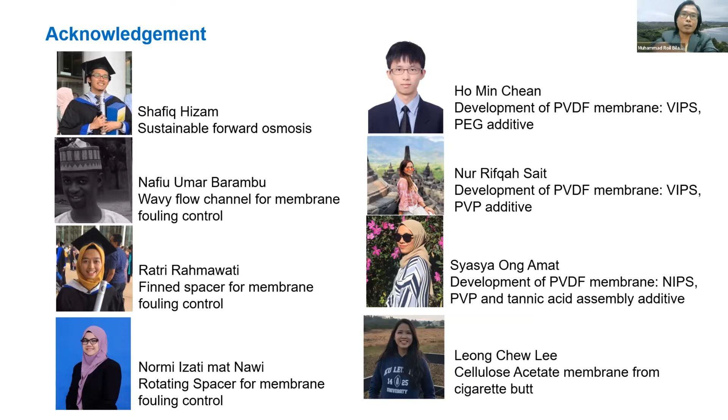Briefly, before I start, actually when you start with membrane, you will be dragged to work on many things. My background and training was on membrane bioreactor actually, but then it spun off to membrane fabrication. Most of my work is on membrane fouling, especially on optimization of aeration for fouling control and hydrodynamics. These 2 topics I will present as well during my talk.

Then there are other things that I have been working on: process intensification involving membrane. I also work on new applications of membranes, like for heat recovery, membrane oxygenator as I call it here, membrane as mixer, membrane adsorption, and many other things.

So my work on membrane and my love on membrane is beyond membrane for produced water, and the application is for many, as you can see from here. But the topic of my talk will touch on membrane fabrication and membrane fouling control for produced water treatment.

This is the outline of my talk. First of all, I will talk very generally on the context of produced water treatment and how membrane processes fit into the big picture, the big process.

Sorry, I have a battery issue. Did we lose him? Yeah, I think I lost him, but maybe he will join soon. I thought this was my computer. Maybe we will take a break for 5 minutes, until we fix the issue with him. He's coming back. Okay, all right, sorry, some technical issue, that's okay.

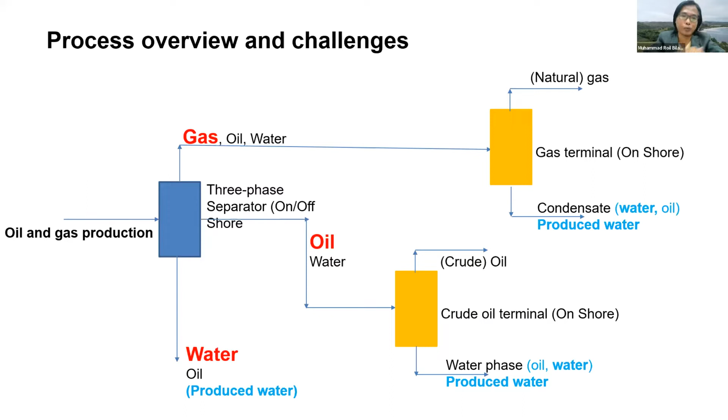Okay, so I continue. This is an overview of how produced water is generated. We initially have the water phase during the three-phase separation, so that's produced water, normally on the oil platform. Then the oil fraction will be piped to the terminal somewhere onshore.

From this stream as well, it contains a minor component of water. And then in the crude oil terminal, we also have produced water over there, so we have to deal with this too. In the gas terminal as well, through the pipeline, some of the water contained in the stream will condense, and it also generates a fraction of produced water. So there are three types of produced water I specify here, all termed produced water.

If you look into how the industry deals with produced water, first of all we have to look into what is inside. It contains suspended oil - you can see the black color of the water in the feed. We have emulsified oil in the form of a stable emulsion, where surfactant helps to stabilize the oil-water emulsion. This really depends on a case by case basis. It can have very high salinity, and it can contain metals, even toxic ones like boron, cyanide, organics including phenols, suspended solids, and sand particles.

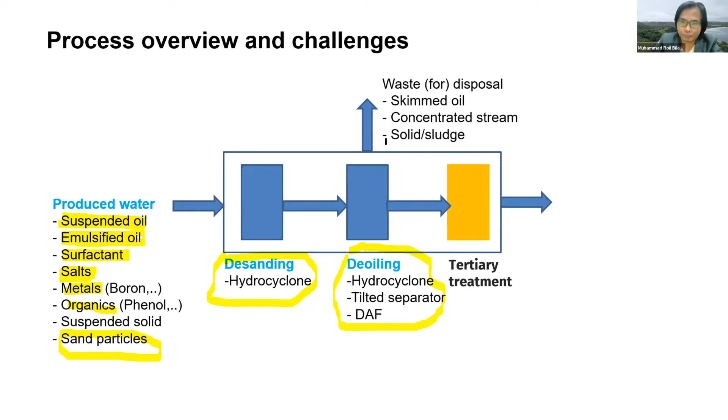Up to this point, then if needed, we add another process - this is the tertiary treatment. The need for tertiary treatment is affected by what we plan for the treated water: will it be for reuse, for example hydrofracturing, for irrigation, or for discharge? We need to develop processes to meet the criteria for these purposes. The tertiary treatments depend on the use of the treated water and the regulations for such purposes. Membrane processes normally fall into part of the tertiary treatment - this is how to see the context.

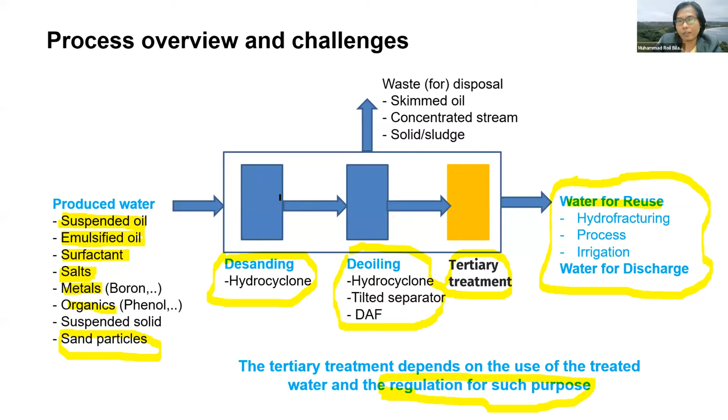As I said in this slide, what membrane process we need will really depend on the feed that we have, the performance of the de-oiling here, as well as what we want to achieve in the end. How are we going to deal with the treated water? For example, in Malaysia, if we want to discharge offshore, we need to have treated water that contains less than 30 ppm of oil.

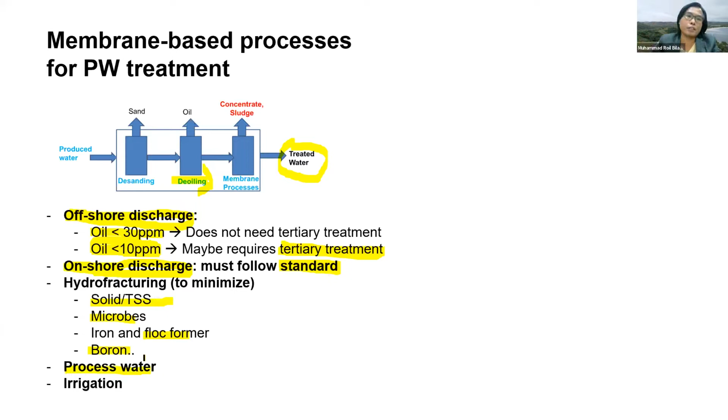If you want to discharge onshore, like in the gas terminal or oil terminal, it has to follow the standard regulation of wastewater discharge. From that, we can imagine what processes are required in the tertiary treatment. For example, if we want to reuse the treated water for hydrofracturing, then we need to minimize the solid, the microbe, iron, and anything that can form floc, boron. If we want to use it for process water, then we have to think about what tertiary treatment is required.

I made a summary of membrane processes that have been reported for produced water treatment. First of all, I think the one that will be mostly used is microfiltration and ultrafiltration. The main function of this process is that they are very effective in removing the oil-water emulsion.

They will definitely be required if in the end we want to apply nanofiltration or reverse osmosis. I think in the future, ultrafiltration and microfiltration will be largely used for offshore discharge, specifically to lower the oil concentration below 10 ppm. But the main issue for this process is membrane fouling, and after a few slides, I will talk in detail about how we can manage membrane fouling for treating oil and water emulsion.

The other process that can be used is nanofiltration and reverse osmosis. Basically, they are highly selective to water, so almost everything will be rejected if we apply this process. It will be placed somewhere at the end of the process to remove the salt, minor organics, maybe if organics removal is required. So we will need nanofiltration or reverse osmosis if we want to reuse our treated water for process.

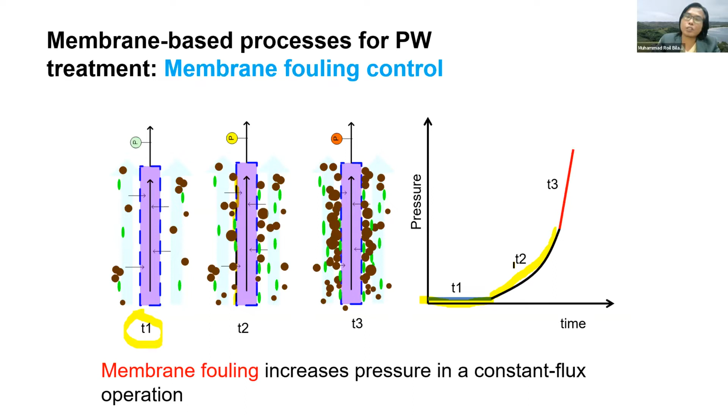So the main consequence of membrane fouling is that we need to operate the membrane in a complex way. It consists of operation cycles. Here I give, I don't know, 1, 2, 3 cycles involved in it. The filtration, for example, we cannot do continuously to accommodate fouling control, but instead we apply backwash and relaxation at certain intervals, normally around 10 to 30 minutes. It can be slightly beyond this, depending on the guideline of the membrane supplier. So we have a filtration cycle.

Then above that, we also have a maintenance cleaning cycle, where a low dose of cleaning chemicals is introduced to achieve a better cleaning. The interval of this cleaning can be from 1 to 2 weeks. It really depends on the operation and the criteria of the cleaning. And then once or twice a year, we'll need to do intensive chemical cleanings to restore the membrane performance that was lost due to membrane fouling.

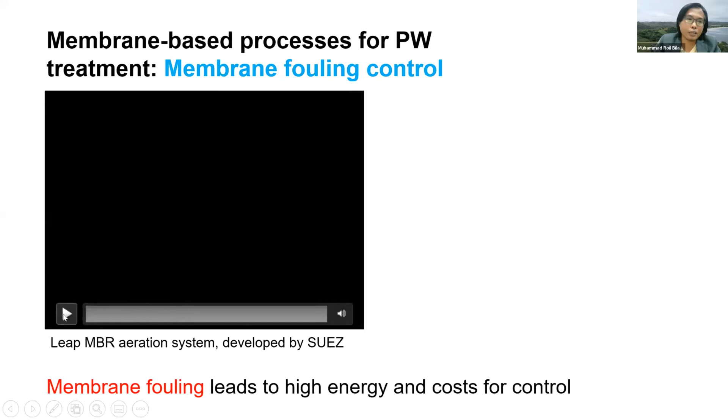I think the current effective way to do this is by implementing aeration. This is probably not necessarily applicable to produced water, but it is an example of a Leap MBR aeration system technology patented by SUEZ. You can see that they use fast flow of air to vibrate the hollow fiber and clean everything, every foulant that sticks on.

Okay, but the general approach for dealing with membrane fouling - there are so many, and I'll try to make a simplification here by classifying them into three.

We can play with the feed. We can do some pre-treatment so we'll have a feed that has low fouling propensity. Some flocculants can be dosed here, but probably not really relevant to produced water here.

We can also develop membranes that are resistant to fouling, improve the structure of the membrane, and fine-tune the surface chemistry of the membrane so that it is more resistant to fouling.

The last approach, more operational, is to deal with hydrodynamics. We try to induce local mixing near the membrane surface by manipulating the cross-flow velocity or flow of fluid around the membrane surface, introducing air bubbles as you can see from the video here, and some with module development. These are the approaches that can be used, and the part I want to talk about later is more on the hydrodynamics - how we can manipulate the hydrodynamics near the membrane surface.

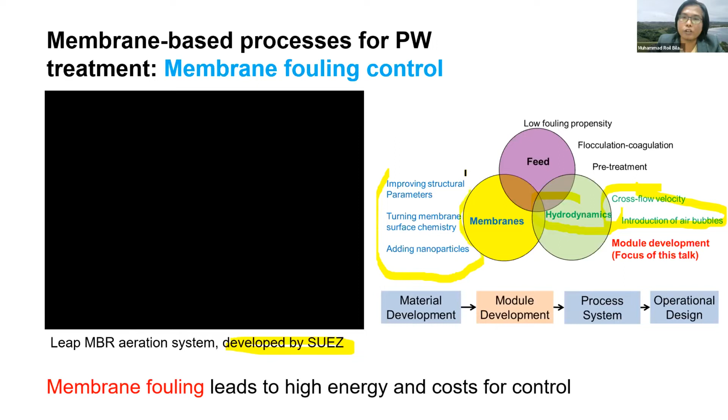Another thing is on membrane development. The first is that we develop new modules - we call it fin spacer. For the conventional membrane panel, we have a vertical plate and frame like this one.

If we go for air bubbles for membrane cleaning, the air bubbles will tend to move in the center. I have a short video here - I hope you can see it. If you have air bubbles, they tend to actually move away from the membrane surface.

So it's bubbling - the conventional bubbling has very poor efficiency. You generate a lot of bubbles, but actually the bubbles don't move near the membrane surface - they move as far as possible from it. And thus the aeration should be optimized.

So what we have developed in our group - you see here, this is a video of the system. We developed a spacer that looks like fins that help to direct the air bubbles to the membrane surface.

You see here that most of the bubbles go to the left side, so we can direct where we want the bubbles to move, and then they really move close to the membrane surface for cleaning. In this video, you can see if we switch to a different side, the system was equipped with a panel that can switch from left to right.

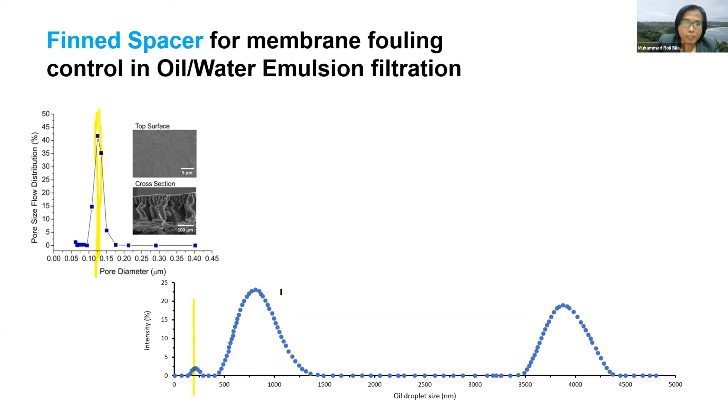In three of the studies I'll present later, we use a lab-made PVDF membrane with a pore size close to 0.1, some mean flow pore size here, and then the oil emulsion from the produced water has a size of about 200 nanometers. So there are three modes: around 200 nano, about 800, and about 4 micron.

In most cases, the oil rejection was very high, so I will not report it here. The use of ultrafiltration or microfiltration will provide very good rejection of oil in emulsion.

For this fin spacer, you see here that we managed to increase the steady state flux by almost double, by 86%. And as expected, the membrane side projected with aeration can offer up to 400 liters per square meter per hour per bar of permeability, and less so for the non-projected side.

Here we look into how many fins we can install. You can see that the more fins, the higher the flux, due to the shorter distance. We can see in the illustration here - if we have more fins, then we can keep the bubbles closer to the membrane surface compared to larger fin gaps.

We have a CFD simulation to try to visualize what's happening. You can see here the movement of the bubbles near the membrane surface on the left side. Actually, we can see there's a counterflow on the other side that assists the circulation of the liquid. So it's not only the contact of air bubbles to the membrane surface that plays a role, but also the secondary flow of liquid on the other side to ensure fluid circulation.

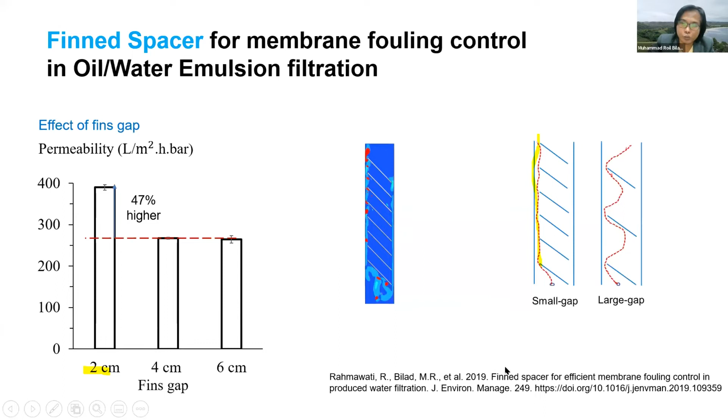Later on, I will share my slides. If you want to know more detail, then you can refer to the publication here.

Another approach we are working on: many people try to develop corrugated or patterned membranes, but when they do that, they have to compensate on other membrane properties. The aim of surface corrugation is basically to enhance local mixing and also increase the surface area of the membrane.

So we have a different idea. Why don't we just use the flat membrane that people normally use, which you can even buy, but instead of a flat arrangement, make a wavy flow channel like this one?

We try to simulate what happens through the flow, and you see here we induce a lot of swirling effect. Basically, we can bend the liquid inside here, and this bending will improve the contact of the liquid or flow on the membrane surface.

As we expect, the wavy channel can achieve about 220 in permeability, while the flat one, as the reference, only achieves about 180.

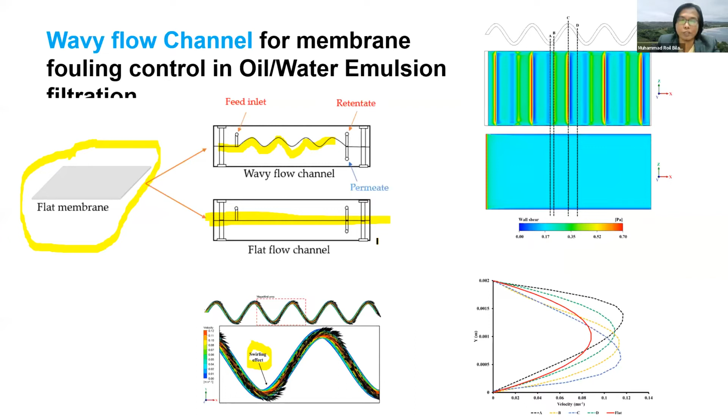We also try to estimate the energy consumption. With this type of membrane, you have a longer flow path, and the nature of the module will affect the pressure drop, which eventually increases energy use. But actually, there is not much energy increment in terms of pressure loss. So this is the second approach we use, improving the hydrodynamics near the membrane surface.

Lastly, this is a new result we have. You can find some commercial products that already have rotating membranes, but the implementation of a rotating system is not that easy, based on our experience.

So instead of rotating the membrane, why don't we develop a spacer that can rotate, so the membrane stays static? This kind of spacer can be placed in a currently established membrane setup. We have a plate and frame membrane, and we put a spacer in between, and this spacer rotates, consuming much less energy.

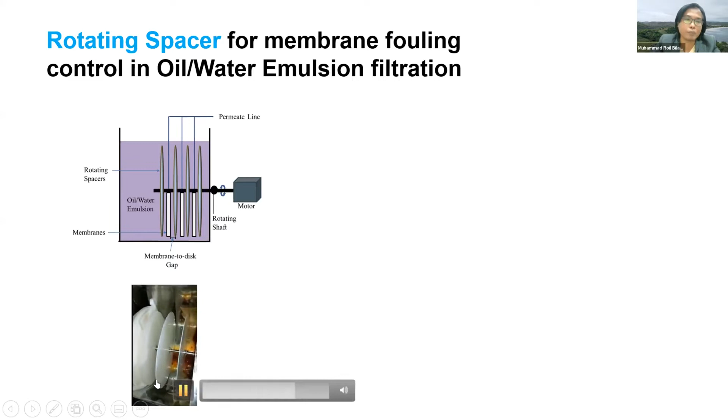This is an illustration of the system. We've developed a bench scale setup here. Maybe it's not very visible, but this static part is where we place our membrane surface, and the disc is the rotating disc that acts as a spacer in our lab scale setup.

We try to visualize this in our experiments. We just use half the diameter, purely from a practical point of view.

Then we look into what the shear rate and shear stress would be on the membrane surface, and here is the contour of the flow around the membrane surface using a CFD approach. The result was quite convincing.

We can increase permeability from about 120 for the static system up to 180 if we rotate it at a speed of 50 RPM.

By the way, this 50 RPM translates to a quite high RPM because of the small dimension of our setup. In a full scale setup with probably a 2 meter diameter disc, we would only require a few RPM to achieve the same linear velocity.

As might be expected, if we place the membrane closer to the disc, at 0.5 centimeter, we achieve higher permeability than if we put it a little farther away.

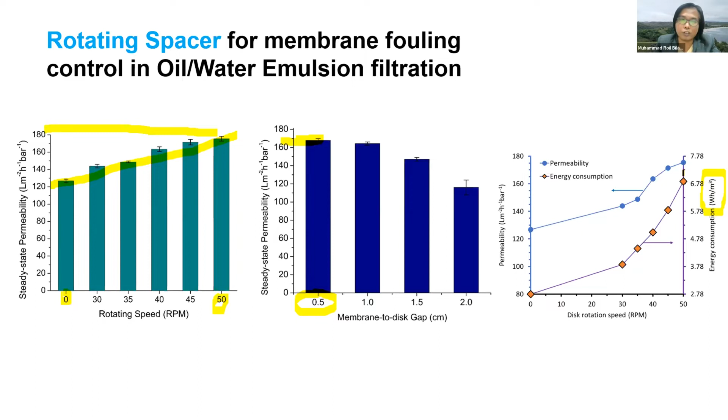The next approach we use is forward osmosis. Why do we go for this one? Because we are dealing with produced water at a gas terminal, which is normally located near the seashore, so we have abundant access to seawater. We found that the produced water has quite low salinity, so we thought of using seawater as the draw solution. Many of you may not be familiar with FO, so let me make an illustration here.

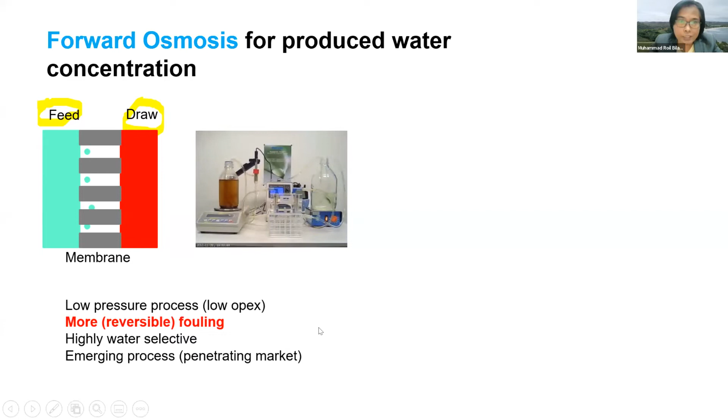The good thing is it's a low pressure process. When we set it this way, the FO will have very low energy consumption because we don't need to deal with draw solution recovery. The process is highly water selective, so basically it will retain almost everything but water. Also, I think it's penetrating the market currently, so it's good for the future. But I want to challenge the claim here about it being less fouling, because of what happened.

So this is the approach that we use, I'll talk a little bit later on. So what happened was this is a control feed, basically clean water, the demineralized water. And then we run demineralized water and produced water in this setup, basically for concentration. So we try to see how much we can concentrate.

And then you can see here that after some time, the flux becomes zero. At this point, we achieve basically equal osmotic pressure concentration, so we cannot achieve beyond this. But the most telling thing is that if you look into the initial flux, the initial flux of the control feed, which is demineralized water, is much higher than produced water. So this is a very strong indication of membrane fouling.

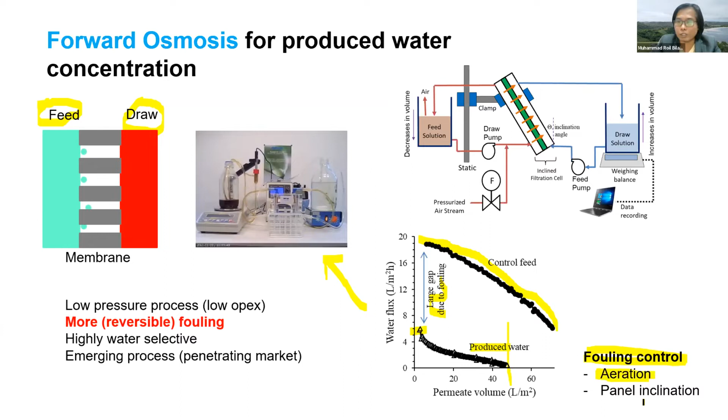So what we achieved, 2 minutes Doctor, okay, what we achieved was a clear improvement in the relative water flux. We can increase it by 60% here. And also we can further improve the performance by using panel inclination.

Okay, I thought I was given 45 minutes. Oh yeah, it's 45 minutes.

Sorry, so I will not go into detail on my point number 5, but the approach we are using here is to develop phase-inverted membranes by incorporating hydrophilic additives, using PEG, PVP, and this one with tannic acid.

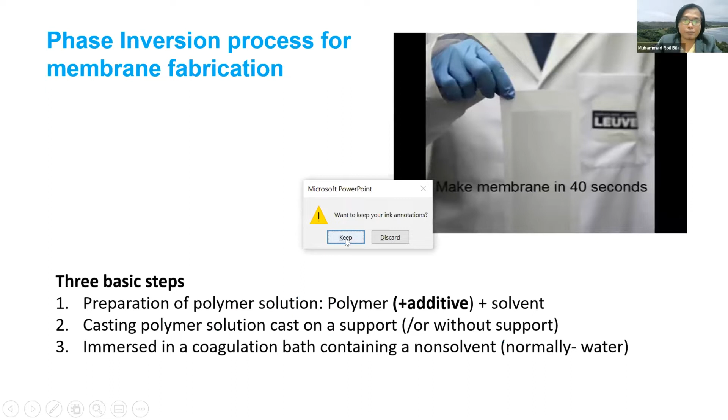The most challenging part of incorporating hydrophilic additives is that they try to leach out during fabrication, so we don't end up with a membrane with hydrophilic properties, because your additive leaches out. Our solution was to implement the VIPS process, vapor induced phase separation.

Actually, we introduced some time gaps between the casting and coagulation. Here we use PEG additive. We achieve quite good performance, as you can see from the flux here, but the issue was that PVDF is semi-crystalline. So as we apply a longer time, the structure becomes quite brittle and the mechanical strength was weaker.

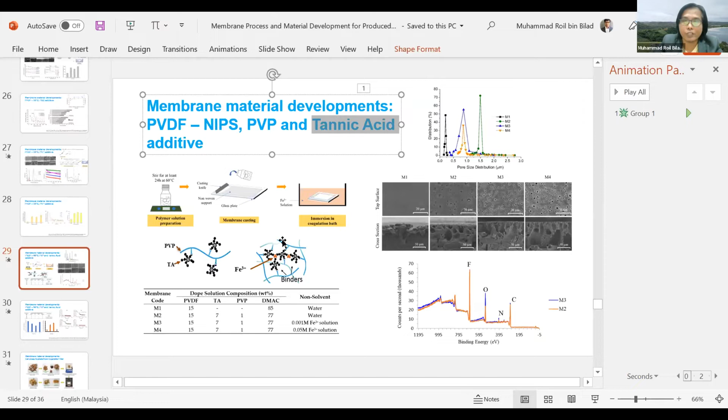We tried to apply a different additive, PVP, but the same issue was that the PVP was leached out. In the final approach, we incorporate another additive, tannic acid, and we form a complex of Fe, PVP, and tannic acid to bind the hydrophilic additive and achieve quite high membrane performance. I will not discuss the last things, so this is what we have achieved so far.

So through hydrodynamic enhancement, we can achieve permeability of around 400 here using finnel spacer. Okay, using finnel spacer here. I'm sorry.

Okay, rotary spacer, we can go only up to 150, wavy flow channel around 200. PVDF, PEG we can have only this amount, PVDF, PVP only this amount. But the last approach, when we combine PVP, tannic acid with complexation chemistry, assembly of tannic acid and PVP, we can achieve close to 350.

So I think the two approaches, to apply finnel spacer and develop membrane material in a smart way, hydrophilic membrane material, can offer good performance.

Okay, I move to the last slide. To deal with membrane fouling in produced water, we probably need to go with multi-prong approaches, not only hydrodynamics or only materials, but a combination of multiple approaches at the same time. I think that's the best approach.

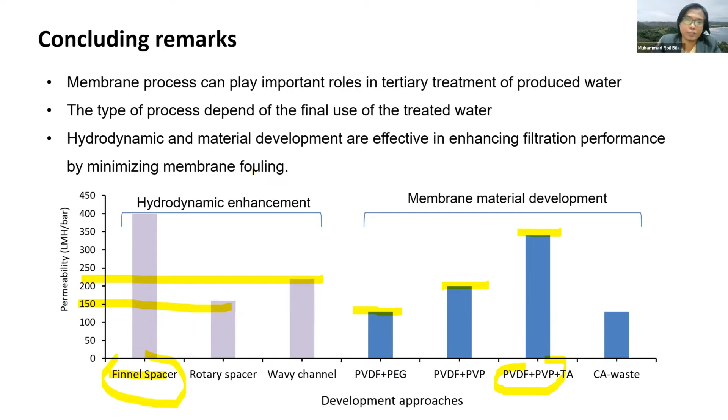Another thing is probably what's next with the concentrate. So whenever we have a membrane, for example RO, we have brine. If we are now treating produced water with high oil-water emulsion, oil concentration, then what happens to that? That is one of the untapped research areas, I think.

Another thing is it's about time to go more holistic, or take a more engineering approach in implementation of membrane processes for produced water. I think that's all from me.

The last few slides I skipped quite fast. I didn't realize I already spent 45 minutes. I think that's all from me. I will welcome questions.

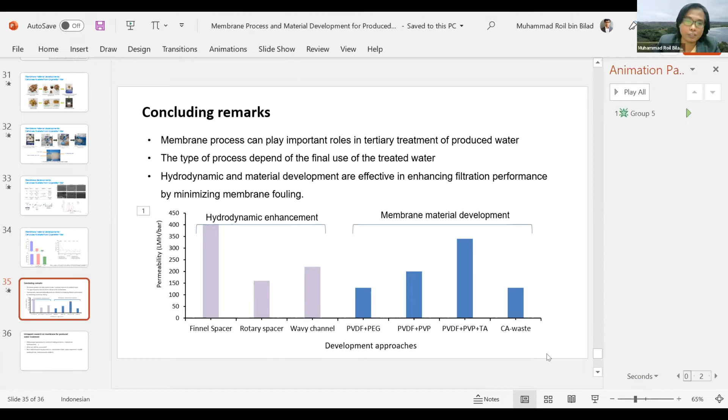Yeah, I was thinking about this the other day. Why not use sponge balls, like those used to clean heat exchangers from the inside? Is it a possibility to use those sponge balls, squeeze them, and then clean the surface?

Is that a possibility? Well, all of you are very smart already, so you get what we are doing now. Actually what we do now is very simple. We add some sponge on the surface, and it's like a wiper in a car that cleans it all the time. It works really well, and we can achieve like double what we achieve now. Yes, that's very true, we are working on that one. We're producing some results already.

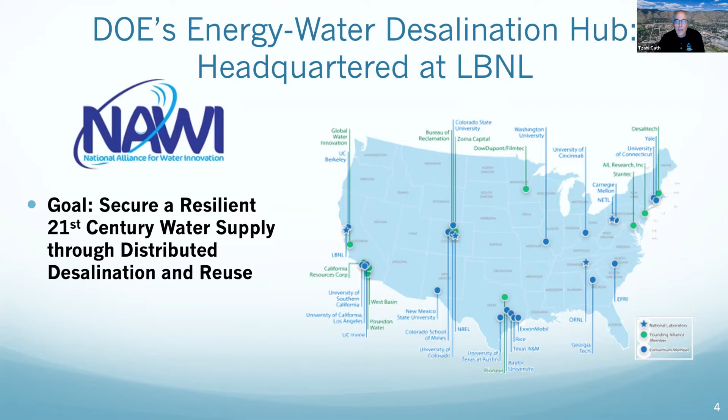So NAWI is a new center funded by DOE, led by 4 national labs and many universities and other partners, with a focus to reduce the cost of desalination of unconventional sources of water, including industrial wastewater like produced water. It's $100 million over 5 years with a focus of TRL 2 to 5. Again, TRL is technology readiness level, so we are stopping before piloting.

This is early stage applied research with 4 topic areas, specifically material research and development, process innovation, modeling and simulation, and integrated data and analysis. We just finished the first year, with the main role of the first year to do road mapping, to look at what are the research gaps in the different areas of reducing water cost. In years 2 to 5, we will have applied research in universities and a lot of collaboration between university and national labs.

So I introduced the different topic areas, but there are also challenge areas. We identify 6 challenge areas with the acronym A-PRIME: autonomous systems, how do we operate systems remotely; precision separation, with the eye to recover valuable material.

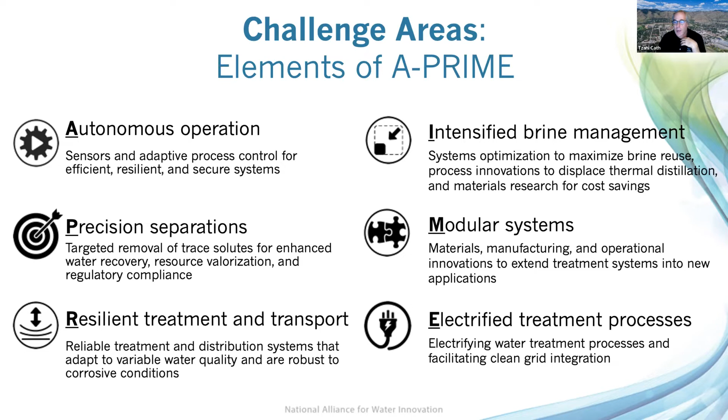Resilient treatment and transport through membranes and through other processes; integrated, intensified brine management - again, as was mentioned today, when we start desalinating water, we are generating very concentrated brine, what can we do with them; modular systems, we are very familiar with it in oil and gas, we want things to be modular, move from one wellhead to another; and electrified treatment process, which I'm still trying to understand exactly what it means, but it has different heads. It's about how to make processes more electrified, like electrocoagulation, and how to combine renewable energy into operations in the field in remote locations. So this is how the world of NAWI looks like.

Here are the challenge areas, the 6 challenge areas and the 4 topic areas, and all the research will go towards the goal of 90% of non-traditional water sources achieving pipe parity. What is pipe parity? Pipe parity is how to bring the cost of the next gallon of water, which is usually more expensive, to the current cost of water.

And when you look at the pipe parity metrics, you can measure pipe parity under different units, like dollar per meter cubed, or how many kilowatts per meter cubed, or what's the water intensity. You have different measures, and we still collect different metrics for pipe parity, but the main topic is looking at the energy cost and the levelized cost of water.

And under all these confusing things, we are focusing on several industries: the power industry, resource extraction where oil and gas is sitting together with mining, other industries, municipal water to include seawater desalination and brackish water desalination, and agricultural. Again, all of you know that these are really energy and water intensive industries.

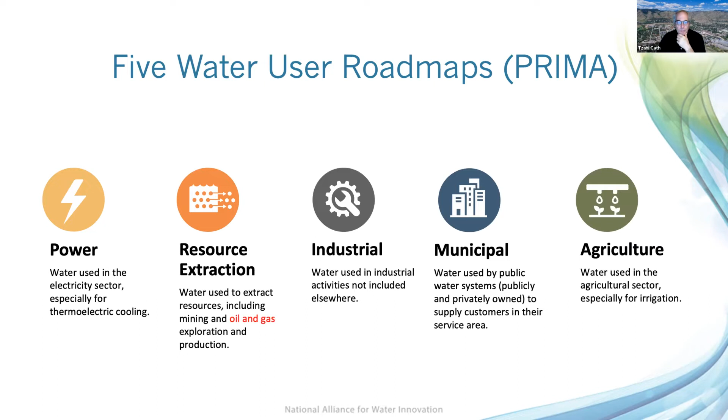So now we just finished and published the roadmap, the master roadmap for NAWI. You can go to the web and download it. I was in charge, with a colleague from UT Austin, Professor Lynn Katz, of the roadmap for the oil and gas sector, and that's published under the same web page. You can also download and see it.

And we recently published a paper on a technology baseline. So what's now existing? What's the cost? We gave a few case studies on specific applications of technologies for water reuse. And I think one of the things we focus on towards the end of the paper is the chemical characterization and toxicity challenges of produced water, looking at future toxicity as a measure of how well we are treating water.

Because, as you know, produced water has a lot of contaminants, and especially when it comes to organic contaminants, it's almost impossible to characterize exactly what's there and how well it's been removed. It's also very expensive to do this analysis. So toxicity can be one measure, and we propose methods for incorporating adverse outcome pathways and toxicity analysis of produced water for reuse. I will not read the paper here. You are more than welcome to go download it and look at what we have proposed.

So, treatment challenges. Again, I will go quickly because Dr. Bilad already mentioned many of these things. Water is a major component in the oil and gas industry, and the major challenges are the high variability of both quantity and quality of the water, and the high salinity.

And when we have high salinity, sometimes some processes are just irrelevant, because of high osmotic pressure, as Dr. Bilad mentioned. You cannot use reverse osmosis, and I will talk a little bit about forward osmosis too.

The other challenge is that it's all about the market. Should we reuse the water or just get rid of it? What's more expensive, to treat the water or to secure new water? Different places in the world have different challenges. Some places you want to get rid of the water; sometimes you really want to reuse it because you don't have other options.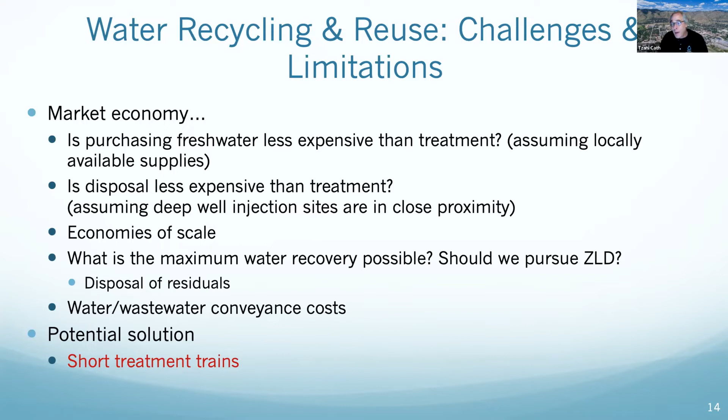So the potential solution we think about is how to make shorter treatment processes, because every process you add—pre-treatment, desalination, post-treatment—just becomes more expensive. So if you have a short treatment train with a few processes that can do most of the treatment, you save money. Okay, so a few thoughts about the cost of desalination.

Seawater reverse osmosis, we all know, is the workhorse. Thermodynamically, we're there—we cannot improve it much more. And when we do seawater desalination, we cannot do much more than 60% recovery, again because of osmotic pressure. We're starting with around 3.5%, which some produced waters are at this level; some are much more concentrated than this.

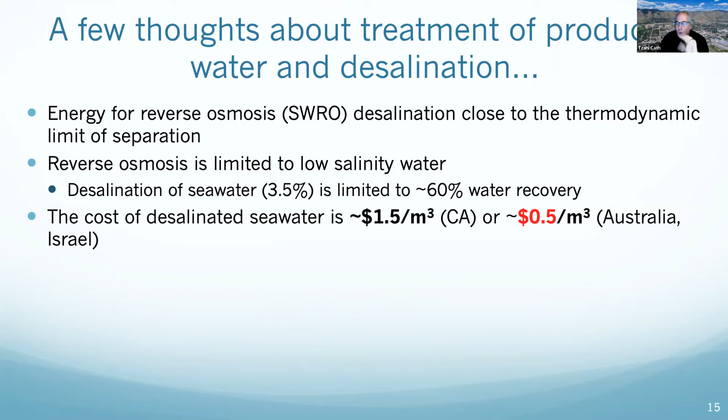Now, if you look at the cost of seawater desalination today with reverse osmosis, in the US it's still a little bit expensive. Places like Australia and Israel have other ways to do it, and it's much cheaper. In the US, in a good day, in a good place, it costs $0.5 per barrel for deep well injection disposal of produced water. When you do the conversion, there are 6.3 barrels in 1 cubic meter.

It tells you that you need to be much less than $3.5 per cubic meter in order for your process to be better than disposal. So it is a challenge, and it's difficult to figure out how to treat it so that the industry will adopt new technologies.

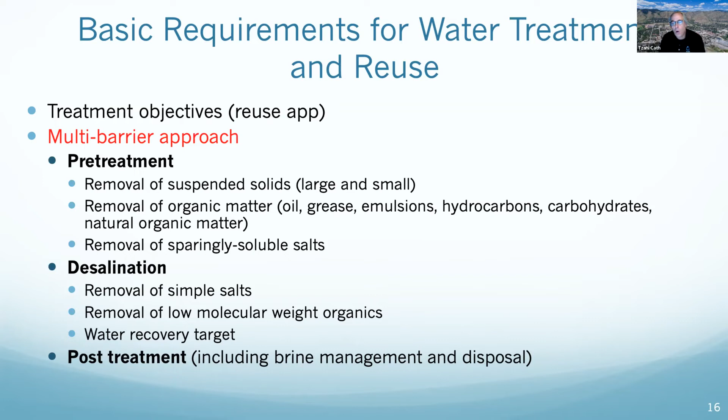So the basic requirement for treatment is a multi-barrier approach: pre-treatment, desalination, and sometimes post-treatment depending on what you want to do with the water. Irrigation will have a different pre-treatment, drinking water will have a different post-treatment. We are all familiar with these requirements when doing treatment.

When it comes to the desalination process, there are new approaches people are promoting for desalination of highly saline water, more than seawater, like closed-circuit desalination, CCDRO, and flow reversal, which is sort of a competitor to CCDRO. People are pushing very hard on ultra-high pressure RO—we're talking about 1,000, now 2,000, even 3,000 PSI of pressure. Something similar is the counterflow reverse osmosis proposed by Yale University recently.

And whatever you look at among these processes, pre-treatment is becoming more and more important to remove organic fouling, inorganic scaling, and other problems you'll have if you don't remove them from the water. So I'll focus a little bit on pre-treatment.

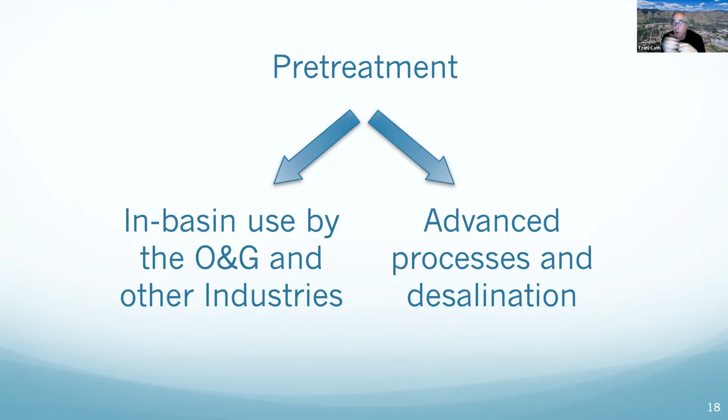When you do pre-treatment, you can either use the water for reuse in the oil and gas field, or we can use advanced processes after that, and desalination, as I just mentioned, to make the water even higher quality for advanced reuse. So for pre-treatment, we can do different types.

We can do physical processes like phase separations, stripping of volatiles, filtration, membrane processes like osmosis. We can do chemical processes like coagulation, adsorption, oxidation, disinfection. There are different things, and we need to combine them sometimes together.

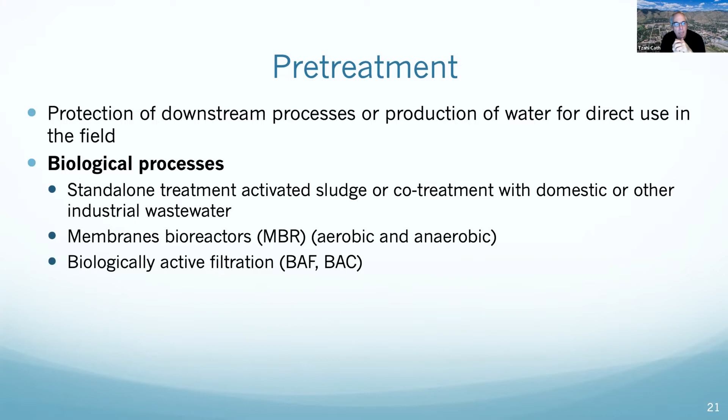For pre-treatment of most wastewater, you can also do biological processes. I'm not a microbiologist, but I think it's a fascinating area if we can convince microorganisms, or select microorganisms, to do what we want. We can do it in activated sludge processes, in membrane bioreactors, or biologically active filters. I'll show some interesting results.

The problem is, of course, the impact of temperatures and chemicals on microorganisms, and the impact of loading rates—how much organics or other contaminants you put in—and the post-treatment needed for this water. And of course, the changes in characteristics of biosolids in the bioreactor, or what we do with these residuals when we are done with the process.

So I'll dive into some examples of processes and technologies that we are testing at School of Mines. Dr. Bilad will have to forgive me because I'll say some bad things about forward osmosis—I made my career on forward osmosis. I think it's a fascinating process, and I think there are a lot of questions about where this process will go. But I'll start with the early days when I started working on produced water.

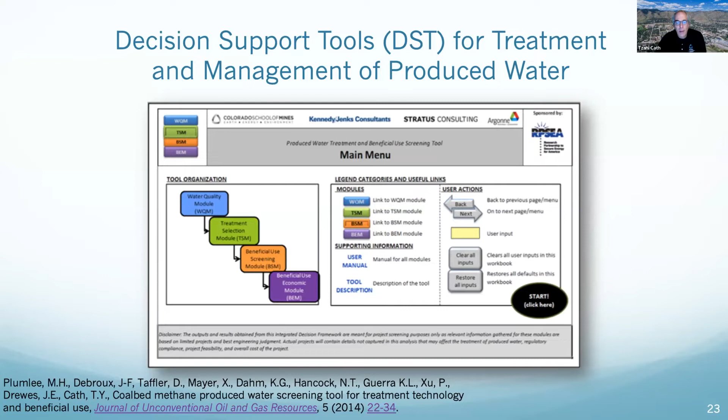We developed decision support tools to select technology for produced water treatment. This tool is still available. We later developed a second tool that incorporated many processes and many water qualities.

I like to give this example from one of my students: a Rubik's cube has 8 corners, 12 edges, and therefore more than 43 quintillion combinations. So when you have a decision support tool to select treatment processes in a treatment train, and you have 32 processes and 46 water quality parameters, you have many billions, if not trillions or more, of combinations, and you have to select what are really legitimate and logical trains.

We published two papers with case studies on that, and again, they're available to you. But the unique thing is that now we've developed a new tool based on these developments, called WaterTap 3. That's a fully developed tool with both the water quality side and more on the techno-economic part of selecting these processes, including the pipe parity parameters.

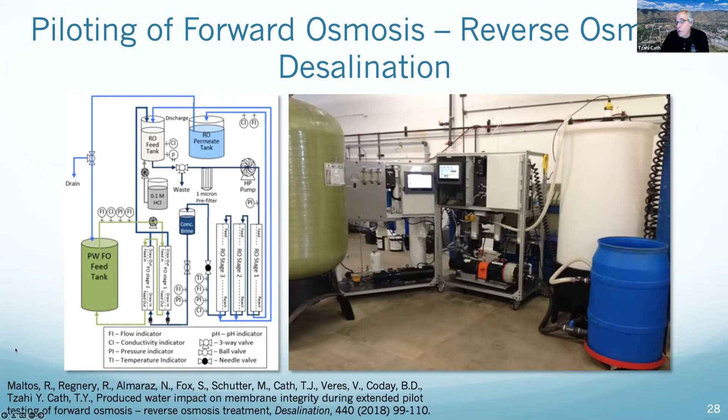We built a small pilot system of forward osmosis and reverse osmosis, and we tested it with real produced water. So what we discovered is that after a while...

But this is the unintended consequences. Over time, as we did analysis with sophisticated analytical tools like liquid chromatography, we discovered a few compounds in the permeate, or final permeate, that we didn't know what they were.

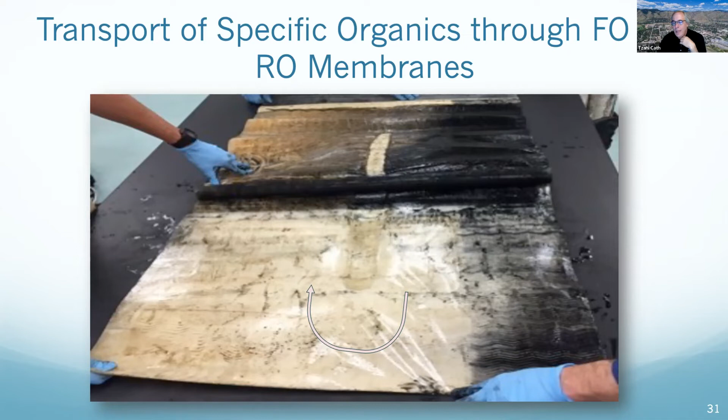Which means that for forward osmosis, you'll need a little bit more pre-treatment. Okay.

I will jump to another approach that we had, and that's biological processes in biologically active filters ahead of ultrafiltration and then nanofiltration. Again, a short treatment train with pre-treatment and desalination.

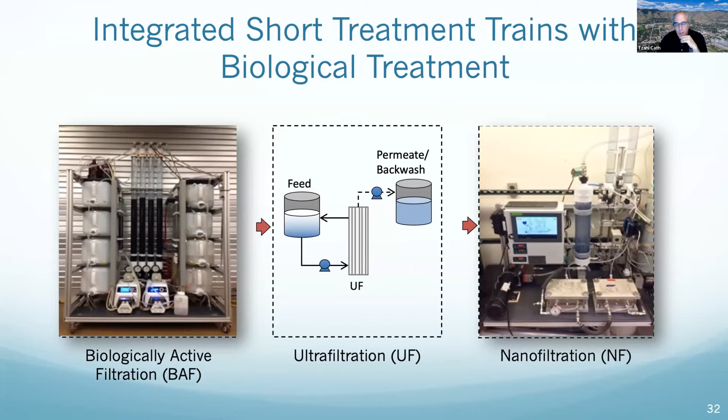We built a small scale system to produce water and test it with real water from the DJ Basin north of Denver.

So starting this process, you have to acclimate the bioreactor. We operated the bioreactor with batch operations. We took a batch of 10 liters, recirculated it in the bioreactor, and you can see that over time, slowly the performance got better and better.

And we got to the point that within 24 hours, we removed more than 90% of the dissolved organic carbon from the water. For the nanofiltration, we compared conventional NF to closed circuit desalination NF.

There are many benefits of doing closed circuit desalination, like higher flux and recovery, lower fouling, less membrane used, and even flux distribution among the membranes.

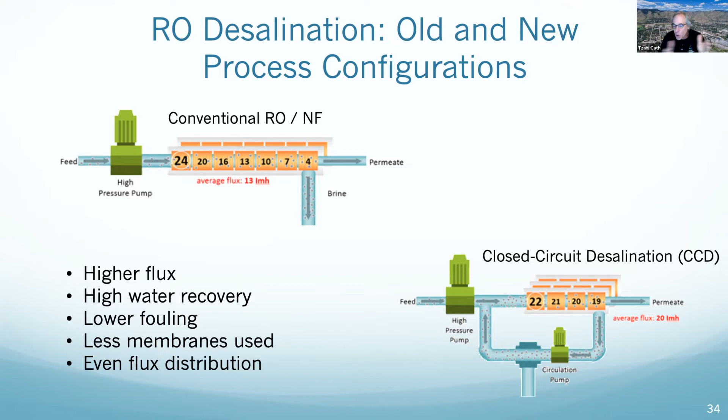These are the pre-treatment, and then in the nanofiltration, as you can see, we tested it under different pressures. And of course, as we all know, higher pressure in reverse osmosis or nanofiltration gives you higher quality water.

You can see that the DOC went from close to 400 milligrams per liter to less than 2 milligrams per liter. And the TDS went from 15,000 to less than 1,000 - almost drinkable water, really high quality water.

We also saw the performance of the nanofiltration membrane, including sort of membrane cleaning in the middle and exchange of a batch.

You see flux decline, of course, due to probably fouling, but overall sustainable operation. And again, very low concentration in the permeate of DOC, total nitrogen, and TDS.

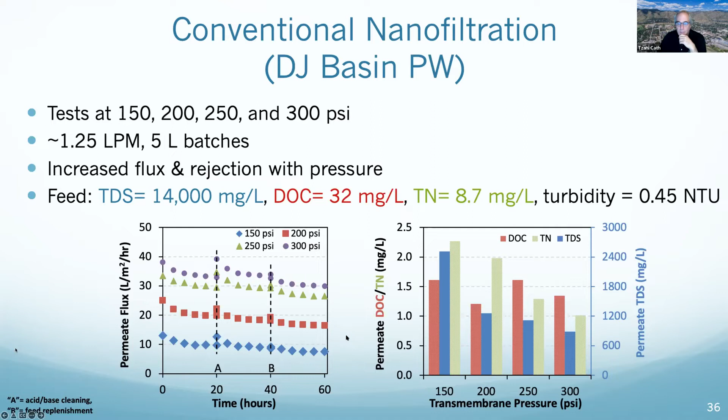We also looked at the performance of the membrane. We tested 3 products: NF90, BW30, and EcoPro. EcoPro is another product from Dow, today DuPont.

Overall, all of them were relatively sustainable and operated very well. We also looked at the rejection of different organic contaminants that you might see in oil and gas.

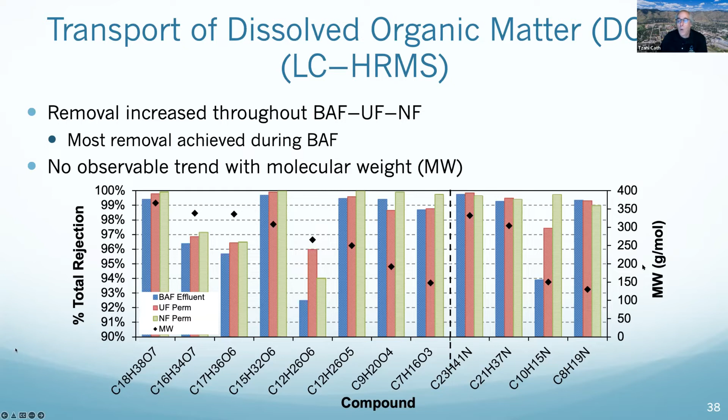Overall, except for a few very high rejections, we did not find correlation between the molecular weight of the contaminants and the performance of the membrane.

But something interesting happened when we looked at the product water from these processes. We started seeing what we call disinfection byproducts.

We have chloride, bromide, and iodide in the water, and we started discovering chlorinated, brominated, and iodinated compounds in the water, some of them at alarming concentrations in the microgram per liter range.

And you can think about it - when you have these compounds and you have methane in the water, and we eventually also discovered some iodide oxidizing bacteria in this water, this is what can happen.

And when we even stored the samples in the refrigerator for 3 months, we actually discovered that the reactions continue, and we actually discovered more of these chlorinated compounds that, as those of you who took environmental chemistry know, some of these are carcinogenic.

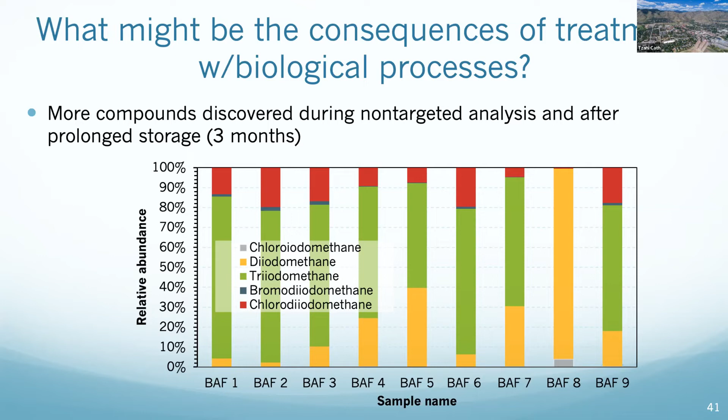So low concentration, still in the water, not something you'd be drinking yet. There are ways to treat it. But again, another thing is you have to think about, when you develop processes, what are the consequences?

The last section I want to talk about is membrane bioreactors. As much as we think - we saw good performance of biologically active filters, that was great, bugs got adapted to it - saying, why won't we go to membrane bioreactors?

And there are many advantages to membrane bioreactors. So we decided to try it, and we built a small MBR for produced water, as you can see here.

We used these Koch Puron membranes that have aeration coming from the middle of the bundle, again to avoid fouling and scaling on the membrane.

We started with water from the DJ basin after we inoculated the bioreactor with activated sludge from a wastewater treatment plant. Slowly we artificially increased the salinity of the water all the way to 100,000 milligrams per liter—sorry, that's not milligram per liter, that's gram per liter.

So this is high salinity, and the target was 100 because the main basin in the US, the Permian Basin, has produced water of around 100 grams per liter.

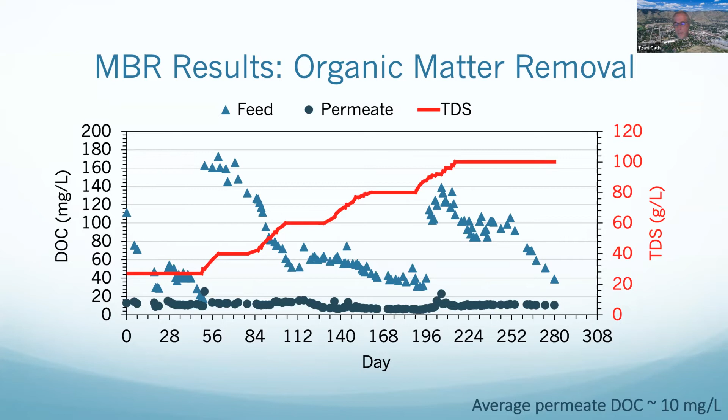With the bioreactor, over almost a year of operation, we brought different batches of water. This decline in the feed water concentration is because of the degradation of the organic matter within the tank, the feed tank. We didn't chill it. But regardless, the permeate is really consistent in quality when it comes to DOC, very clear water, and the average permeate DOC is 10 milligrams per liter.

We then switched to water from the Permian Basin with approximately the same TDS concentration. This water naturally has a lower DOC concentration, but the DOC in the permeate jumped up, and we're still trying to figure out if it's something the microorganisms don't like in the water, or if it's different organics that are more difficult for them to degrade. This is still ongoing research to understand why the DOC concentration is higher in the permeate there.

Again, it is still a process under development. Fouling can be an issue, but if you do a good pre-treatment, you'll be fine.

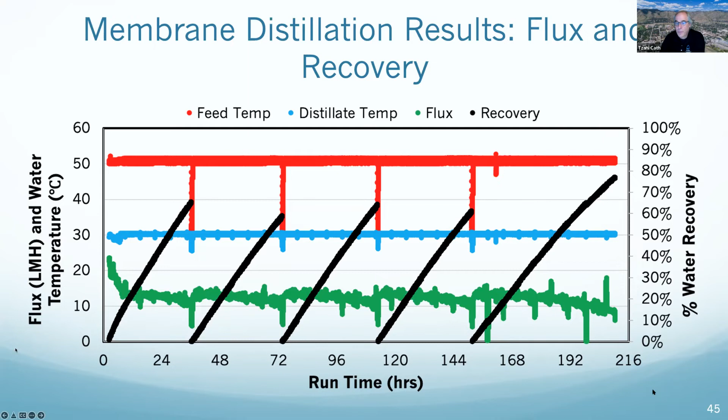Cath? Yeah, I'm two slides from the end.

We're doing many other studies that we don't have time to talk about on produced water treatment, from irrigation to what to do with the solids, and other types of bioreactors.

I'll end the presentation with a study we're doing in collaboration with the U.S. Environmental Protection Agency, looking specifically at the toxicity of water as we go through treatment steps. We think toxicity will be a nice measure in the future for how clean the water we are producing from produced water is.

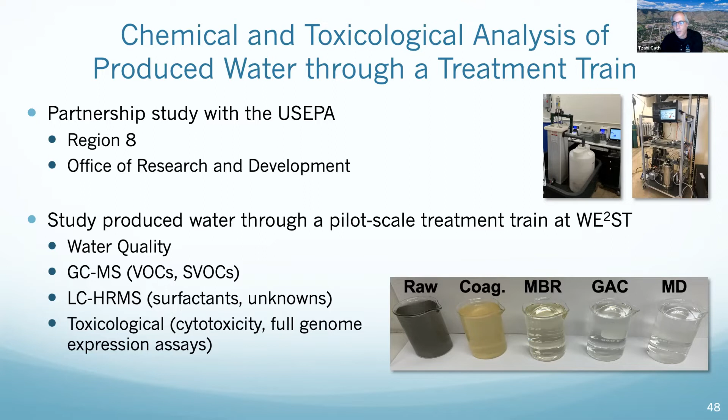And with that, thank you so much. I'll be happy to take a question now or later.

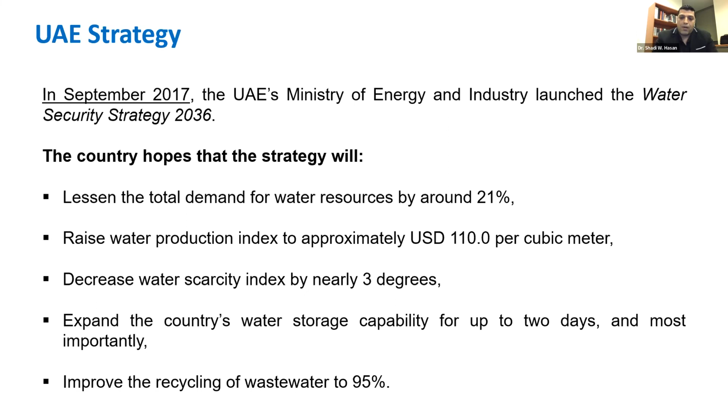So looking at the industrial wastewater treatment market, as you can see from this figure, it's growing rapidly. It's progressing quite rapidly over the past few years, and it's expected to grow in the near future.

The amount of water that is being generated as either produced water from oil and gas exploration or from oil refineries is basically huge. If you look at the produced water from oil and gas, we say 3-to-1, so 3 barrels of water for each 1 barrel of oil, and between 0.4 to 1.6 barrels of water that is being generated when we refine crude oil.

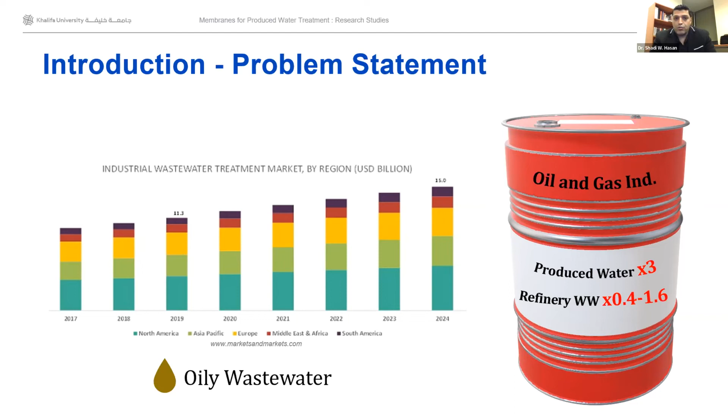So we are looking into more or less the same problem here. As I said, we have produced water generated from oil and gas exploration, and the oily wastewater generated due to the oil refining process. We don't want to mix up these two things, although they have a lot of common features, but with slight differences.

For example, in produced water you have more dissolved organics, whereas in refinery wastewater you have more inorganic, non-dissolved pollutants. So we need to be careful when we address each type of these oily wastewaters.

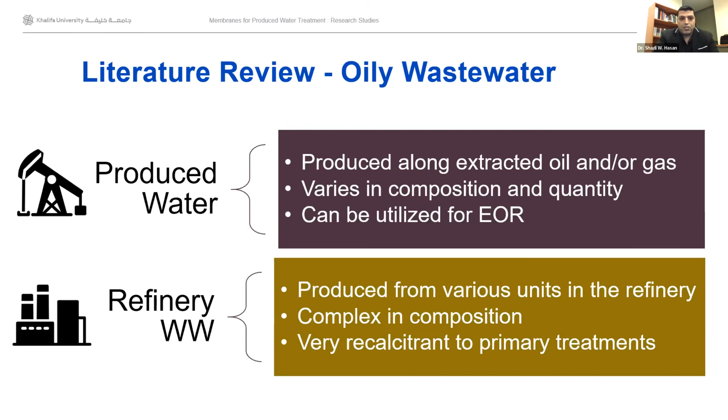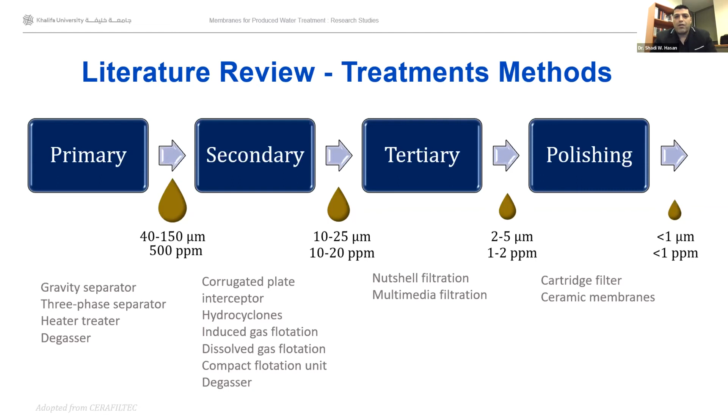I don't want to go through that again because thankfully my colleagues Professor Cath and Dr. Roil presented very well the different treatment processes or methods, going from primary, secondary, tertiary, and sometimes polishing, for these types of wastewater in order to achieve a sufficient or meeting-requirement water quality.

Professor Cath also talked about electrified treatment processes, and he reminded me of the technology I developed back in Montreal, Canada, during my PhD studies more than 10 years ago, what we call the electro-membrane bioreactor. We incorporated an electric field inside the membrane bioreactor and observed significant enhancement in overall water quality in terms of nutrient removal, along with significant reduction in membrane fouling, and so on.

This can perhaps also be tackled, as I will show you at the end of the presentation if I get more time, in terms of how we incorporated advanced oxidation processes for the treatment of produced water. This is just a generic slide showing the different membrane schemes we have, going from microfiltration, ultrafiltration, nanofiltration, to reverse osmosis.

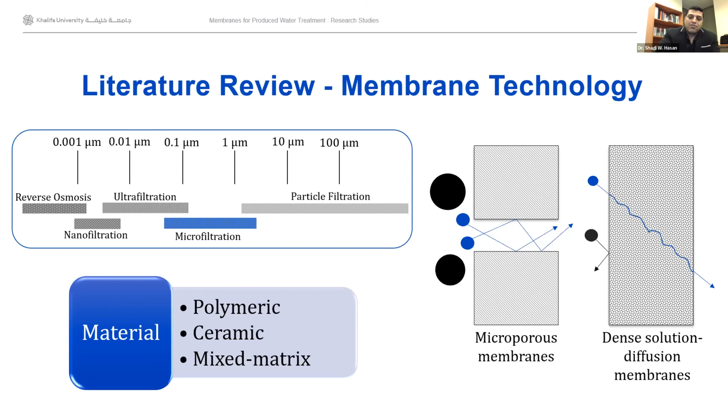This is where I'm going to throw in a few research studies done by our group at Khalifa University, involving mixed matrix membranes as well, incorporating nanotechnology and nanomaterials, in order to tackle several issues associated with the treatment of produced water.

I'm going to take you through this study, and I will not go too much into the technical aspects of these research studies, but I invite you to look them up—some are published already, others are still under review, so they haven't been published yet.

If you need more information or more details, I invite you to go through these papers, and I'll be happy to discuss with you any interest offline as well. You're very welcome to send me an email, and I'll be more than happy to respond to your questions.

This study is the preparation of titanium oxide silica ceramic membranes via dip coating for the treatment of produced water. It was developed by our ex-master student, Sarah, and the work was published in Chemosphere.

I'll take you through this very quickly. What we've done in this work is basically synthesize TiO2-SiO2 ceramic membranes through the dip coating method.

In membrane fabrication, I don't think we'll have enough time to go through all these very interesting, fascinating subjects, especially for young researchers. In membrane fabrication, you've got several methods you can deal with, starting with dip coating, to phase inversion, to electrospinning, to interfacial polymerization, and so on.

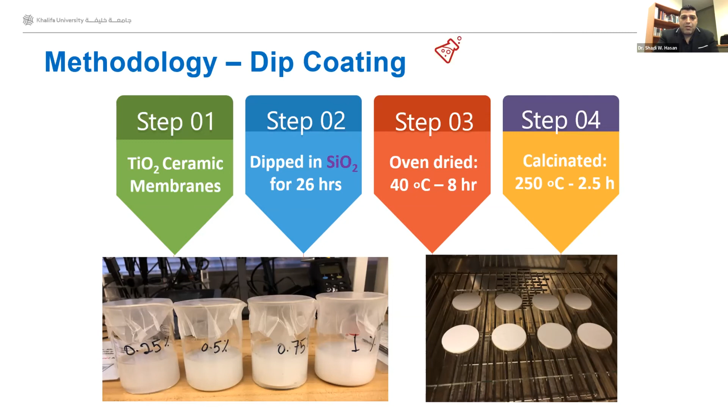We prepared several silica solutions at different concentrations, from 0.25 wt% all the way to 1 wt%. The ceramic membranes were placed in these solutions for 26 hours, then oven dried at 40 degrees Celsius for 8 hours, and finally calcinated. As you can see from the picture, the final ceramic membranes were coated with silica.

We used advanced characterization tools such as SEM, EDS, FTIR, Raman, and so on. We did a whole bunch of performance tests in order to understand and stand on the performance of these membranes after coating, since we wanted to study the impact of coating these ceramic membranes with silica.

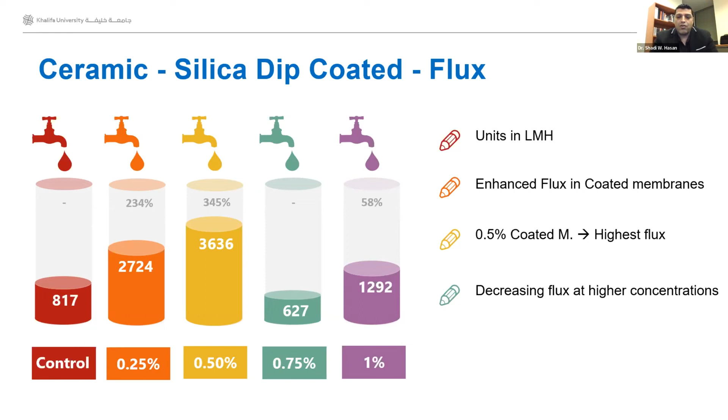So these are the performance results. Control is basically a pristine membrane that was not coated with silica, compared to the other concentrations of silica used in this study. You can see the variation going up and down, but basically we enhanced the water flux significantly by coating the ceramic membrane with silica.

Apparently we generated or fabricated hydrophilic or superhydrophilic membranes, and that was evident by the contact angle measurements or analysis.

Do you have any adsorption? Do you have any electrostatic repulsion? So we wanted to see the surface morphology.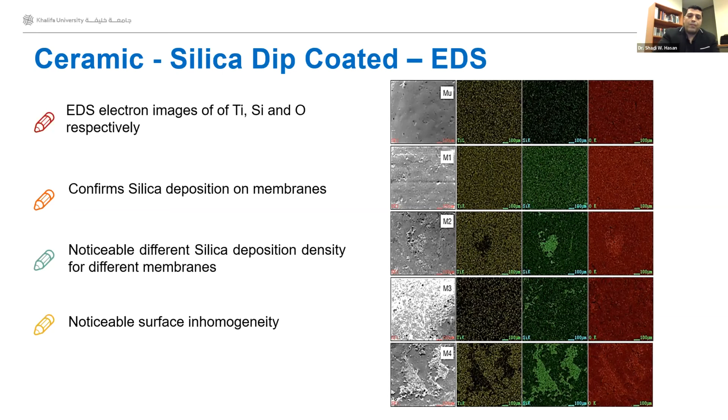EDS analysis is done in order to understand the elemental mapping on the surface of the membrane, so you get your membrane and do EDS on the surface. Here we wanted to confirm if silica was present on the surface of these ceramic membranes. From the EDS analysis, we could see some silica deposited on the membrane, confirming the attachment of the silica nanoparticles onto the surface.

We've done further analysis, FTIR, Raman, and so on. All of these supported each other, and we could see some peaks representing silica, indicating successful attachment on the membrane surface.

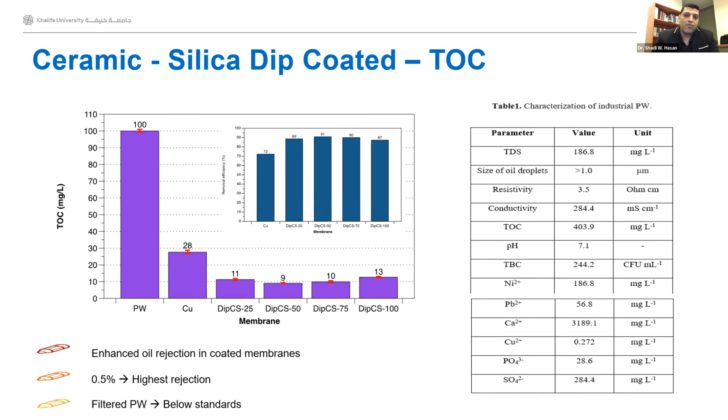So here is the performance test. From that we could see there is a significant removal efficiency of TOC, total organic carbon, which represents the oil content in the wastewater. On the right side you can see the properties of the produced water, and we worked with real oily wastewater obtained from a local refinery in Abu Dhabi.

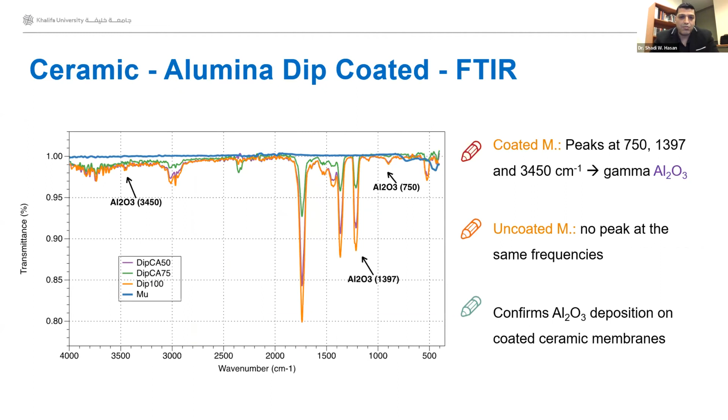The next part, which I'm going to go through very quickly: here we replaced silica with alumina, Al2O3, and followed the same protocol. We calcinated, did characterization, tested the flux, tested the contact angle. We picked up several SEM images, FTIR analysis, Raman, to understand the attachment of alumina on the surface of the membrane.

In this work, this is a continuation on the TiO2 ceramic membrane, but in this case we try to use or decorate iron oxide Ag composite nanoparticles on the surface of TiO2. This work has been submitted and is still under review.

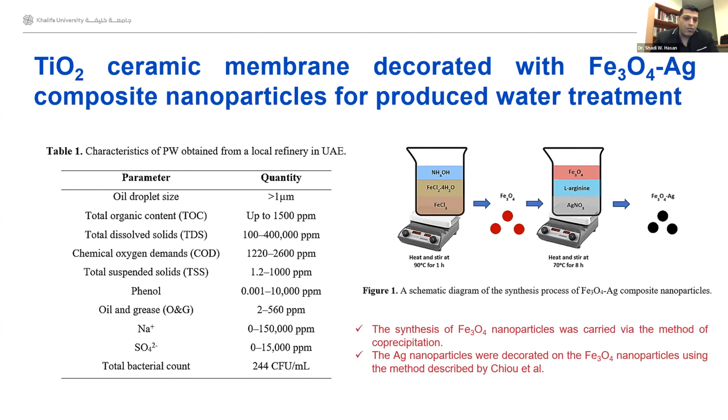As I said, we wanted to do this via chemical attachment. So we prepared in-house the iron oxide nanoparticle, then we attached silver, decorating the Ag, the silver, on the iron oxide. After that, we checked for the successful synthesis of Fe3O4Ag through several characterization techniques.

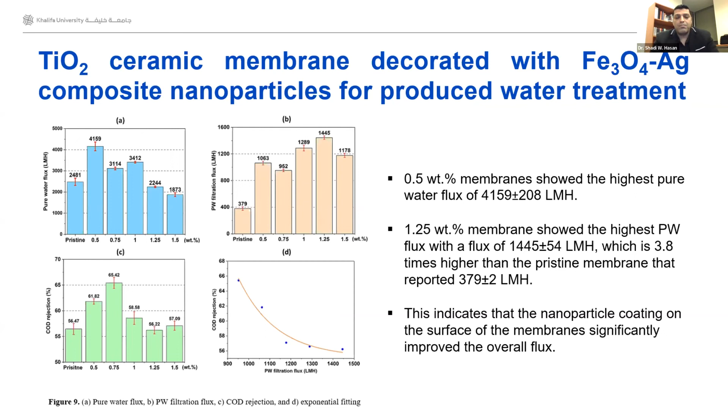We also did post-filtration characterization to understand the removal mechanism, so what's happening exactly with our membranes. This work was also done by our postdoc, Dr. Mustafa, on the development and synthesis of nanofibers.

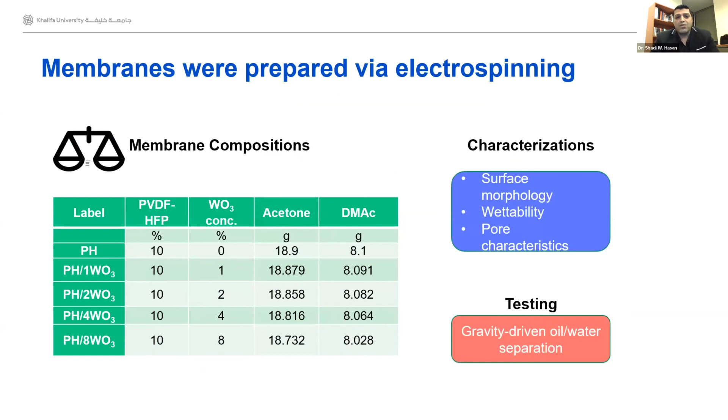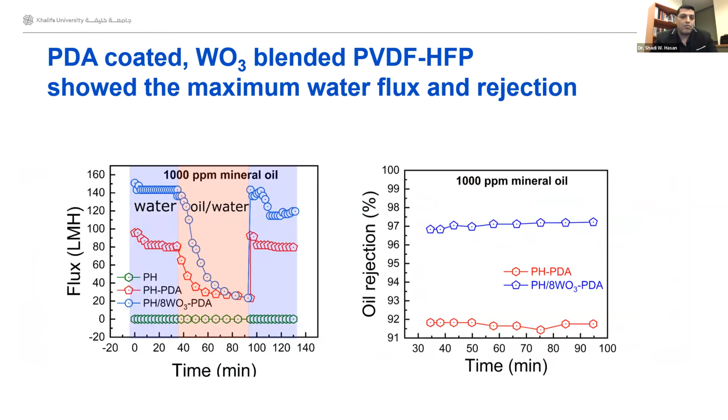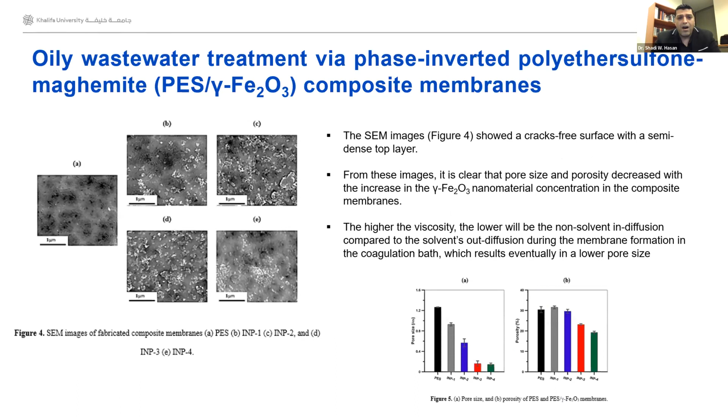Some post-filtration images and zeta potential surface charge studies helped us understand if we have any electrostatic forces, repulsion or attraction. Lastly, we have the super hydrophobic iron oxide oleylamine in UF membranes for water-in-oil emulsion. Because, once again, are we looking into hydrophilic or hydrophobic membranes? Do we need to pass water, or do we need to pass oil? All of these decide the approach that we follow.

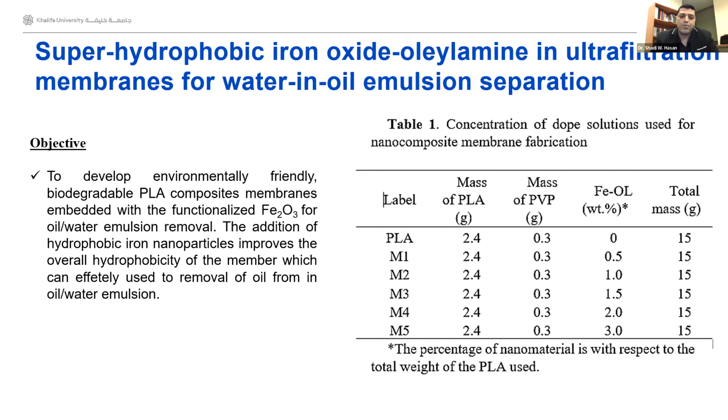Lastly, very quickly, and this is in accordance with the integrated systems that Professor Cath talked about, and I totally agree with him, we tried to combine three different technologies into one. We used ozonation as an advanced oxidation process, electrocoagulation, as well as ceramic membranes, for the treatment of oily wastewater. This is a very interesting piece of work.

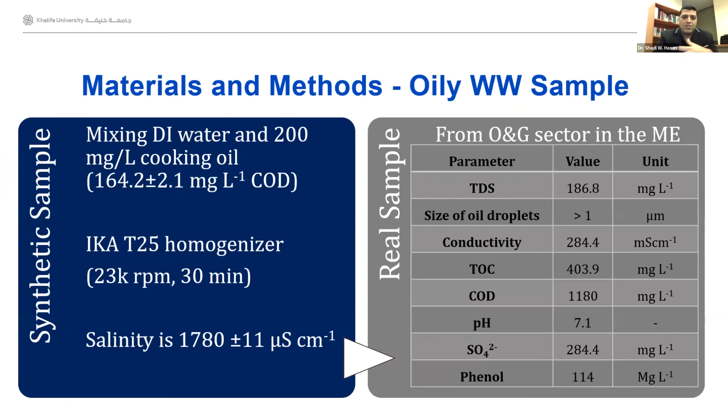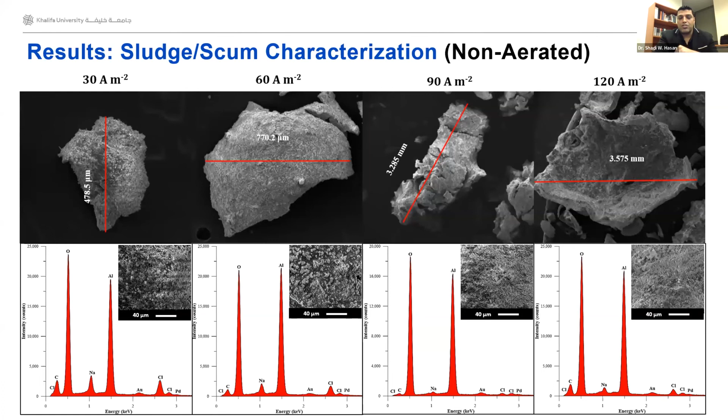I invite you to go through these papers, hopefully you find them helpful. At the end, I would like to acknowledge all the research team: my students, my postdocs, my research staff, and also Khalifa University for the research funding and continuous support.